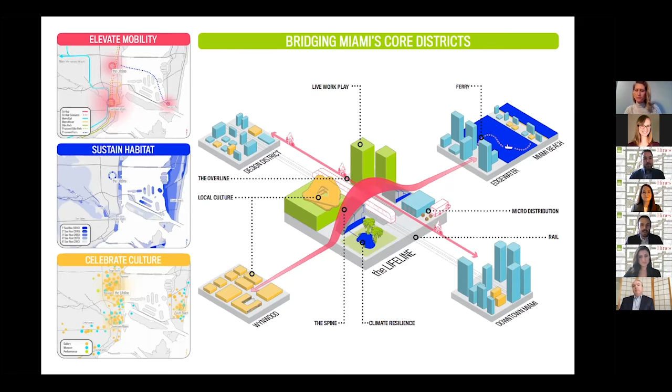The existing context of the Lifeline is a diamond in the rough, as its destinations remain isolated from one another in the wider region. The colorful art galleries, shops, and restaurants of Wynwood, Midtown, and the Design District to the north are separated by infrastructural barriers like the Florida East Coast Railway and wide car-dominated roads. While Biscayne Bay is only about a half mile to the east, on a hot sunny day, you wouldn't even think of walking there from Wynwood.

The Lifeline turns these barriers into connections between people, cultural, and natural amenities. Beginning at Wynwood Walls on 26th Street, the Spine runs through the site, and then along 28th Street, leading directly to the public park and ferry port on the banks of Biscayne Bay. Along the Spine, the Lifeline rewards walkers with a unique mix of arts, culinary, and cultural amenities, creating a seamless cultural corridor throughout Midtown Miami.

Everything comes together at the heart of the Lifeline, with urban systems working at multiple levels. The pedestrian experience is prioritized in all aspects of the design, with the elevated pathways offering generous open space for the public. This pedestrian spine is activated with a variety of food and drink options, storefront retail, cultural destinations, and well-programmed events throughout the day.

We offer affordable street-level spaces to ensure a diversity of cultural and commercial tenants. Cyclists are welcomed into the space by providing a connection route up this corridor and allowing access to the new elevated bike pathway, the Overline.

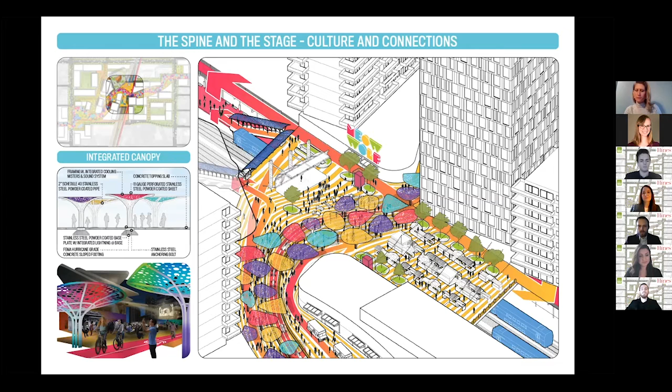Between these two art nodes, the stage creates a vibrant, adaptable public space that will host the main events at the Lifeline, providing space for activity and engagement, both programmed and organic. Day or night, residents and visitors have a reason to stop by, whether it be a farmer's market, live outdoor music, games, or dancing.

The Oasis is a natural plaza and the southwestern ending of the spine, creating the main gateway between Wynwood and the Lifeline via 26th Street for pedestrians and water flows. The plaza and traffic lanes are curbless, creating a shared space where people are given right-of-way and cars move slowly with caution. Pedestrians and bikes flow among the bioswales and rain gardens, creating a meandering path around the plaza.

The main water feature of the Oasis, a retention pond, is the terminus of the Eastern Spine treatment train and the release point of stormwater back into the Biscayne aquifer. A connected line of bioswales and rain gardens runs down from the spine into the Oasis, channeling stormwater runoff from the site's many buildings and public spaces through cisterns underneath the spine and back towards the retention ponds in the Oasis. The cisterns are elevated on top of generators to allow water to generate electricity during storm events. In other words, the Oasis provides water, power, and relaxation to the Lifeline.

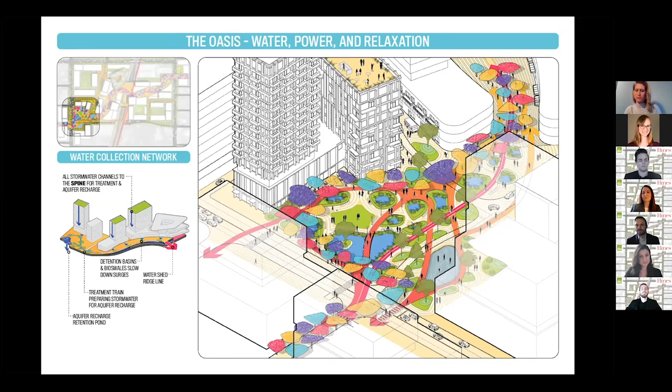The Lifeline is a comprehensive site development, which gets a running start in its first phase, which assembles the site parcels and develops the site's main infrastructure. This includes parking structures, power generating water detention systems, the canopies, the Tri-Rail station in the stage, bike highway, and micro distribution center. During this phase, a robust portion of our project's market rate and affordable housing develops, among the 21C boutique museum hotel, an indoor-outdoor food hall, combined with public spaces, Class A office, and retail.

At the center of this, we partner with Gary Nader to bring his long-planned Nader Art Museum to the site, which will invigorate the retail along our spine and spin off nearby art experiences and events. In phase 2, the Lifeline expands to Edgewater. This phase will include both market rate and affordable housing units. We will continue our retail corridor and develop additional Class A office, which is accessible via the train station, bike path, walkways, or surrounding streets through the parking structures that are below the site.

Phase 3 encapsulates the Lifeline's 4 corners and thus the entire project. We are growing the community by developing nearly 1.4 million square feet of housing, market rate and affordable, the most we have developed across all 3 phases. Additional retail and public spaces will be developed to support the site's growing population, commuter traffic, and visitor numbers. During phase 4, as shown, the Lifeline is adapting for change with our long-term resilience strategy. Beyond our pro forma, we plan for infrastructure to support the capacity of future residential tower development in the event of sea level rise when nearby Miamians seek higher ground.

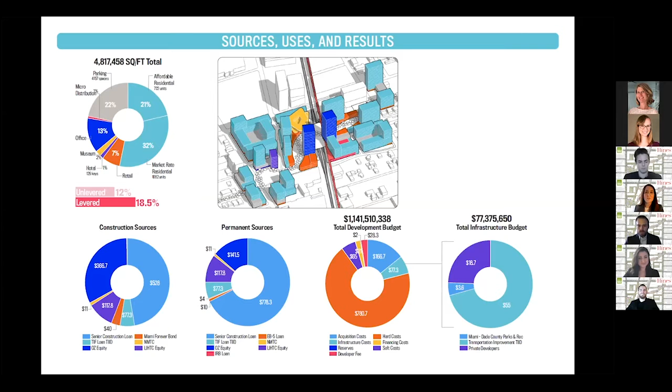But as currently planned, we use a complex and creative capital stack to produce an overall project levered IRR of 18.5%. In construction and permanent sources, we show our reliance on traditional financing loans across all phases. In addition, we use subsidies including EB-5 equity investment in our hotel, low-income housing tax credits, the Miami Forever Bond, and Opportunity Zone funding. In our uses, you can see our development budget exceeds $1.14 billion, including the various costs such as acquisition, along with hard and soft costs associated with bringing this development to life.

Next, we focus our attention to our real estate and corporate development partners, such as Block Capital Group and the Related Group of Florida, who are active and experienced within the Wynwood and Edgewater communities. Amazon will operate our micro-distribution center. In sustainability, Lifeline is proud to share the mission of the Miami Forever Bond and the city's Chief Resilience Officer, Jane Gilbert, to build a stronger, more resilient future through active response to climate change, sea level rise, and flood

prevention. Mobility partners include the county's transportation planning organization that allows for Smart Miami and making the new Tri-Rail stop at the Lifeline possible through the Transportation Infrastructure Improvement TIF. With the help of the Port of Miami, the ferry opens up the Lifeline to Miami Beach. These nodes of connectivity will create positive economic impact for the Lifeline and neighboring real estate developments.

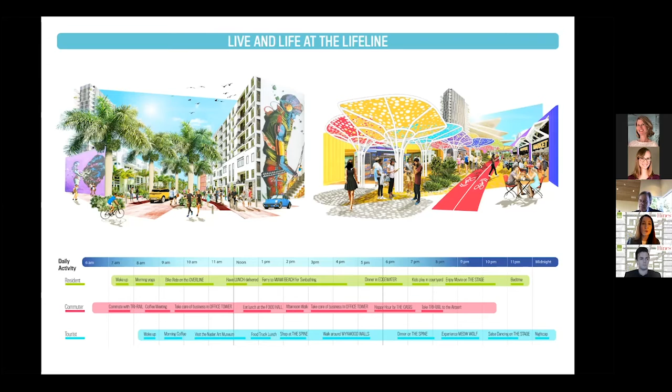And retail, I think we're looking for a blend of tenants, and our presentation has outlined that fact. We certainly want to keep the residents that exist on the site today, such as Mr. Baguette and Anatomy Gym and tenants like that, yet also allowing for commercial tenants to come in. But we also know that commercial retail has been on the decline steadily for the past 5 years. And as we continue to grow this development, that retail will probably be more service-based.

So based on my conversations with Bill, real estate rents in this market can range from $30 to $90 per square foot. Our pro forma outlines a blended modified gross rent of $67. We can't really account for in our pro forma any subsidized rent or percentage rent factors because we can't underwrite them. But I do think that we've done a good job at allocating our costs to build this.

And some of it's pop-up, some of it's food trucks. Those don't really have a cost associated with them other than allowing them space and receiving the upside. But like I said, in the sources and uses slide, low-income housing tax credits, and certainly EB-5 equity investment in our hotel. That's a main source of financing for our hotel development.

Gretchen, may I ask a follow-on question? Sure, go ahead, go for it. We kept looking for a drawing in your package that would describe what it's like down at the station level, underneath the covered portion. What are your design ideas about how you make that an appealing public space? Caroline, do you want to take that, and maybe do we want to go back to an axon that may exist in the presentation?

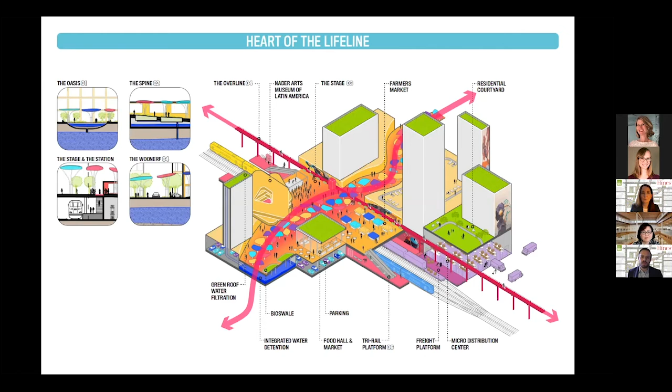All right, so our site actually adapts to the context very well. A few things that we did is the extension of Northwest 2nd Avenue coming down, that it actually connects to Midtown, and there's new developments up there with lots of retail. And there's actually pedestrianized streets up there. So we actually continue that down into our site and follow that line. So that's one way we connect in.

Also, we see that we keep the car connectivity along, sorry, and the pedestrian. We have our residential development.

Yeah, I think Christian's having a little bit of connection issues, so I can go ahead and take over a little bit. So part of our development, as Christian said, focuses on the northern connectivity and the creation of this woonerf, bringing people in. We really tried our best to not make this a super block by creating porosity through side streets, namely more quiet side streets for the residential connectivity.

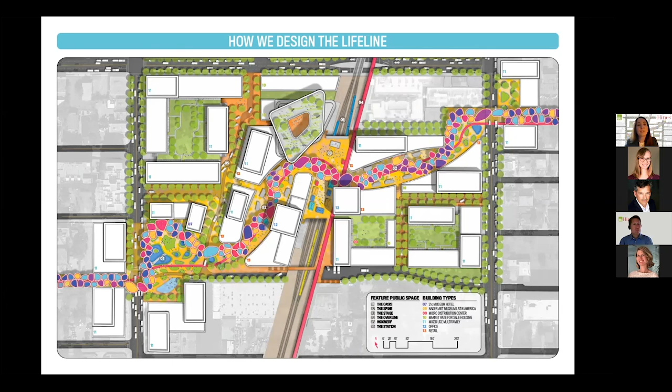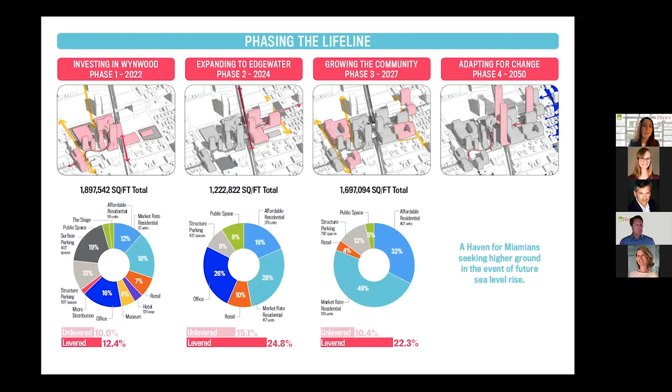It's just in phase 3 by taking over those 4 blocks and trying to be economical through each very important program, such as the train station and the office component and the spine and the public spaces. The phasing worked out that way where we address it within each phase, but in phase 3, it really is about growing the community. And our phasing can be flexible. If we have to meet a higher demand, we can certainly be adaptable in our planning and allow for more housing.